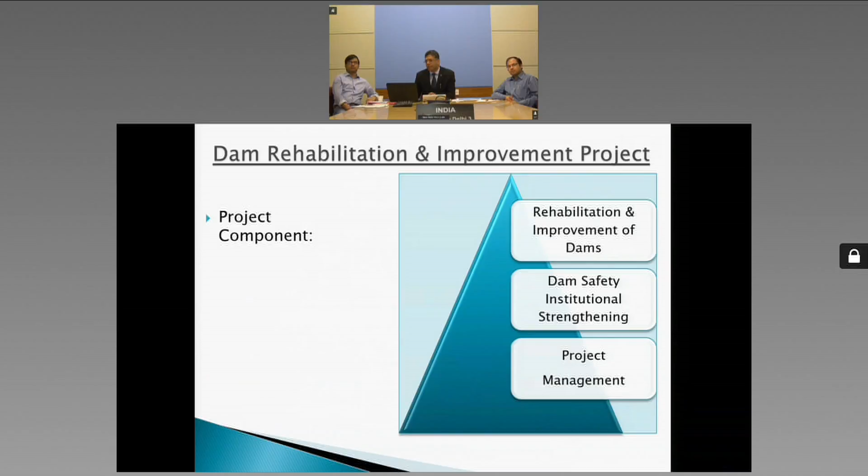As part of the project management, we have also got the services of an international consultant, essentially coming from France, and that becomes part of our central project management unit. Coming to the cost component, the project is presently estimated to cost about $310 million US. Almost 82% of the cost is going towards the hardcore component, that is the rehabilitation and improvement component for the dam. About 8% of the cost is dedicated towards capacity building, and 10% is going towards project management.

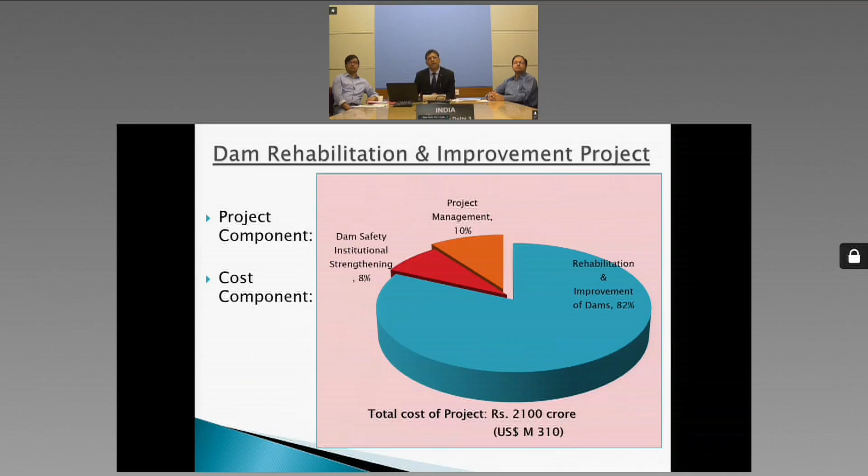The project implementing agencies, as mentioned by June, are spread over 7 states. In the states of Odisha, Madhya Pradesh, Kerala, Tamil Nadu and Karnataka, the implementing agencies are essentially the Water Resource Department. But from Kerala, Tamil Nadu, Uttarakhand and Jharkhand, we also have the power utility agencies. So altogether we have 9 implementing agencies which are part of the DRIP project.

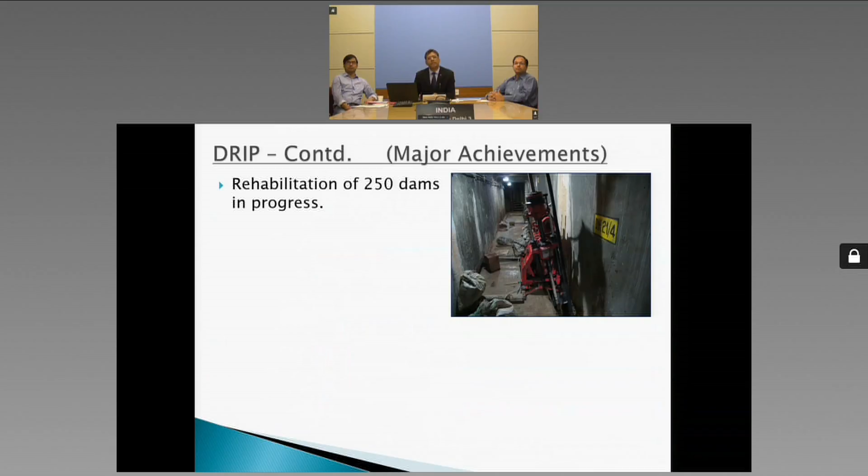I would like to touch slightly on the achievements under DRIP. We have already done the preliminary preparation part of the rehabilitation, and the works are in different stages in 250 dams. We have been able to do a kind of research study in understanding the unusual deformation which we are observing for over 40 years in our Idukki Arch Dam. In fact, Idukki is our only arch dam in India, and we encountered some serious unusual behavior, which we have investigated, and we are going ahead with the rehabilitation program of Idukki Dam.

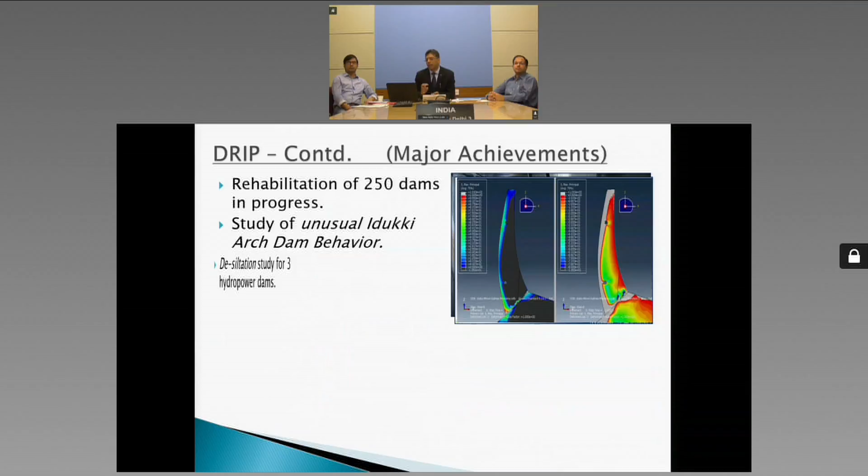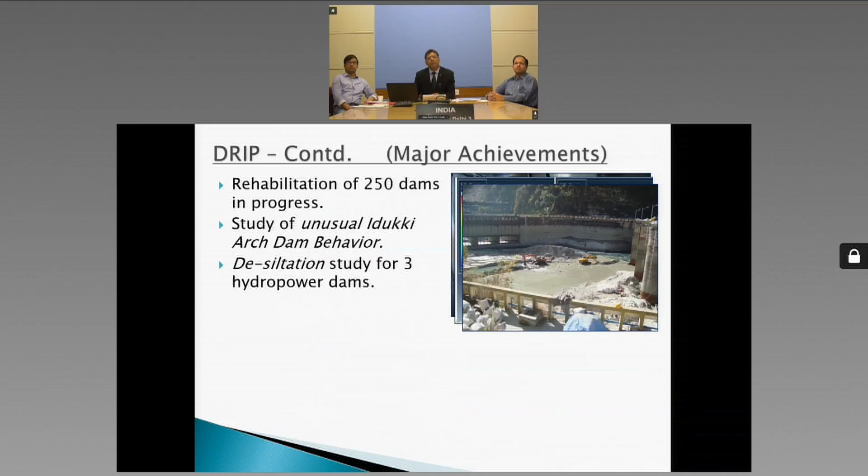We have also carried out a desiltation study on 3 of our power projects in Tamil Nadu, and we will shortly be taking up the rehabilitation measures to that extent. We have also recently taken up a study of a crack in Konar Dam. It's a very prestigious dam which initially started with flood management, but later on has become a multi-purpose project. And there have been cracks for a pretty long time, which has also compelled us to keep the reservoir at lower levels. So this study and subsequent rehabilitation will be very important for us.

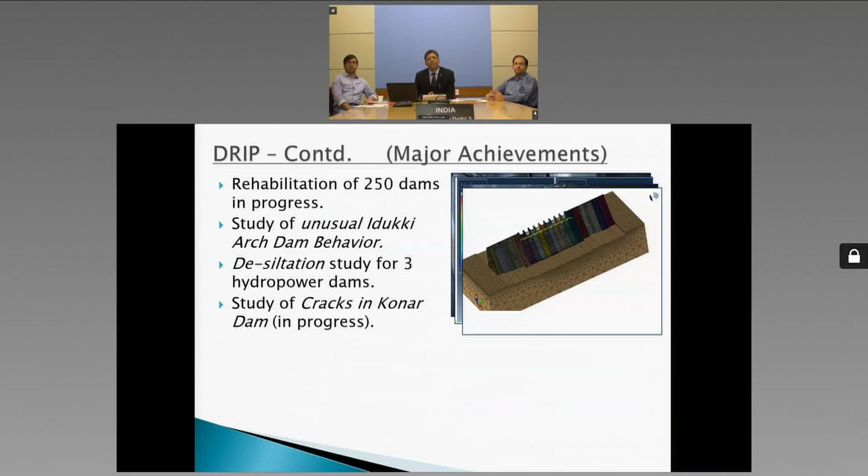Apart from that, in different rehabilitation programs, we have also tried to bring in the people inclusive approach. So in this one activity which we are going to focus on at Hirakud, we intend to bring a lot of input in terms of making our dams more people friendly. Our spillway capacity enhancement project is targeted with the intent of bringing people inclusiveness to the project at the Hirakud location.

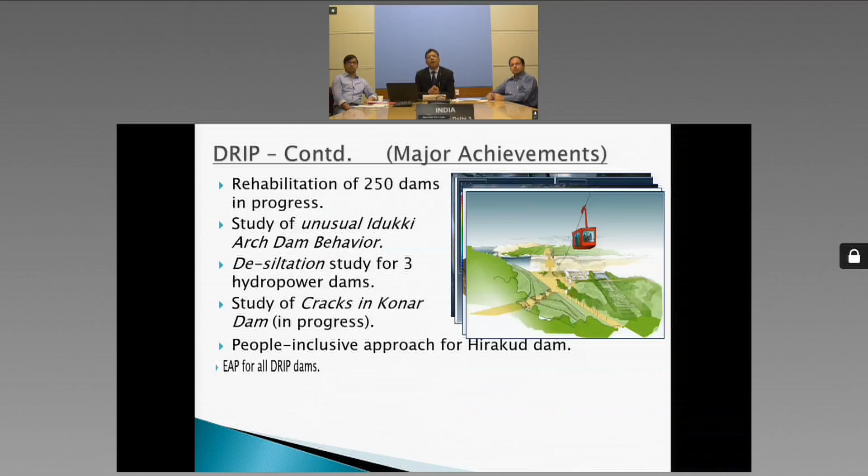Unlike Japan, where you have much more confidence in terms of the safety of the dams, in India we have a little uncertainty, especially in terms of flood management, and we need to have an emergency action plan, not only for a dam break scenario, but even for extreme weather conditions, where even the regulated releases from the dam are going to cause havoc in downstream areas. So we need an emergency action plan practically for each and every large dam of India.

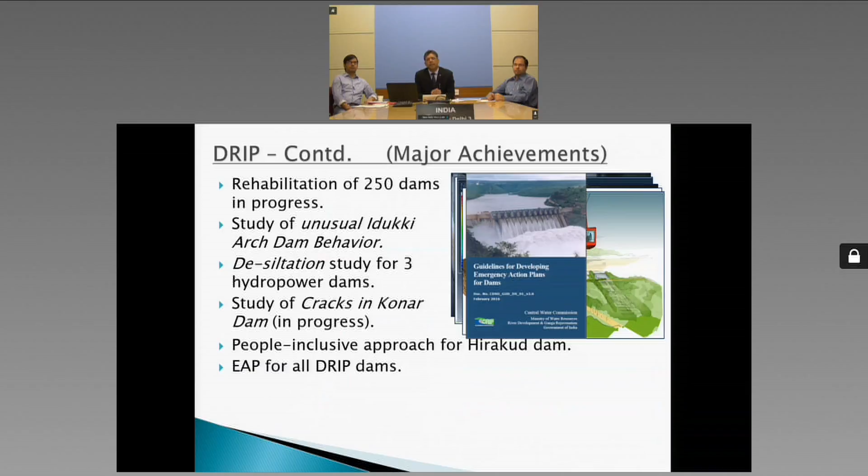So this activity we have also taken up under DRIP, and we intend to prepare an emergency action plan of very good quality for each of our DRIP dams. In fact, recently we have also come out with guidelines for developing the emergency action plan, and this activity has been taken up in earnest.

We have also decided to prepare a kind of asset management tool. We call it Dam Health and Rehabilitation Monitoring Application. It's a web-based software, basically asset management software. The work has already commenced, and we are ready with about 3 modules of this project. And shortly we will start gathering information using this software.

This software is going to be a very comprehensive software which will target complete information about our dam assets across India, including information which is purely engineering in terms of every asset component, also information related to periodical inspection, and also information related to every possible stakeholder, which is important from a dam safety point of view.

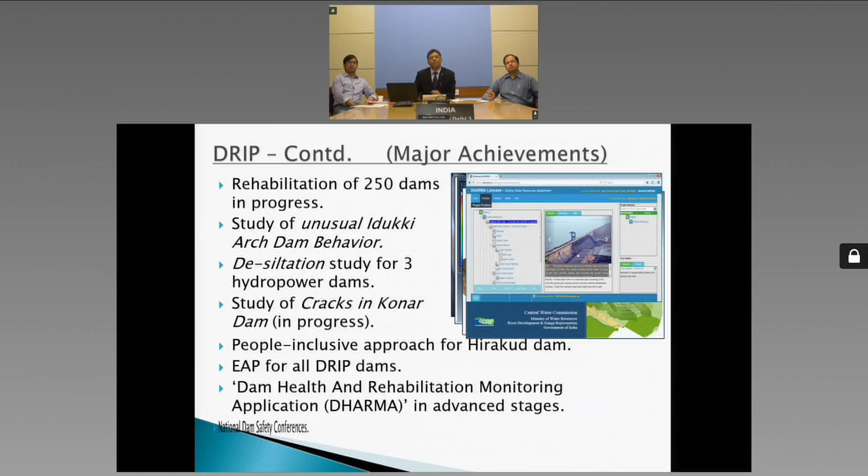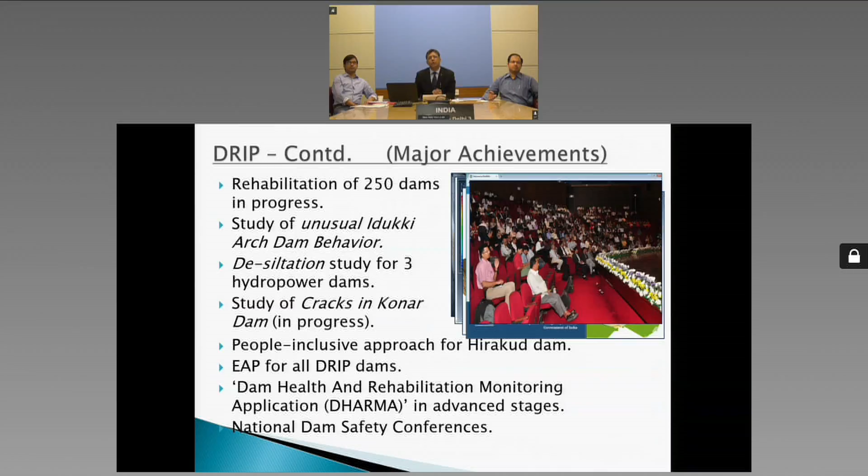As part of institutional capacity building, we have also started the National Dam Safety Conferences under DRIP. 2 of our conferences have already been held, the first one in Chennai followed by the second one in Bangalore. In fact, we got the privilege of our Japan delegation joining for our Bangalore conference, and the 3rd Dam Safety Conference is scheduled at IIT Roorkee in February 2017, and we would be happy if one more delegation can come and join for that program.

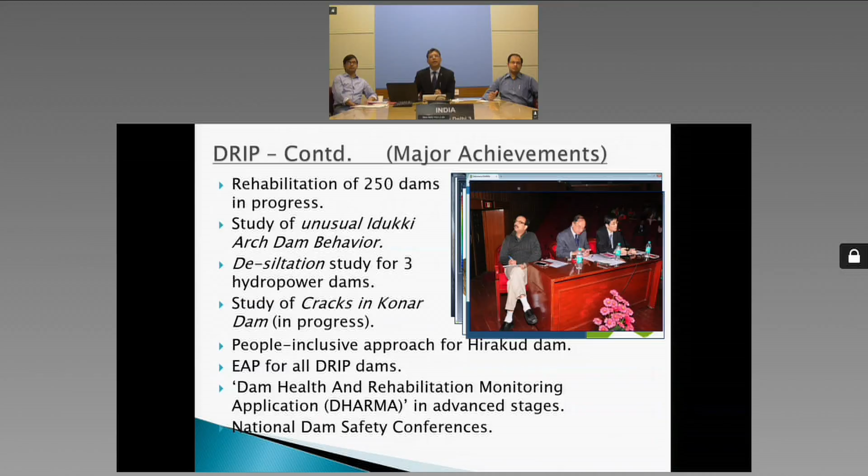Coming back to the exposure visit to Japan by the Indian side, so far we have gone through 4 visits where about 23 participants have taken the benefit. In fact, apart from Madhya Pradesh, the Water Resource Department of Tamil Nadu and the Damodar Valley Corporation, every other implementing agency has already joined this particular exposure visit program.

The key benefits which we have been able to gather, if I try to summarize, are the exchange of knowledge, exposure to some important dams, 7 dams altogether the team members have been able to visit, and of course the benefit of networking with the officials of Japan, especially the Japan Water Agency, and definitely the exchange of customs and culture, which I understand has been a key to continuing our collaboration further.

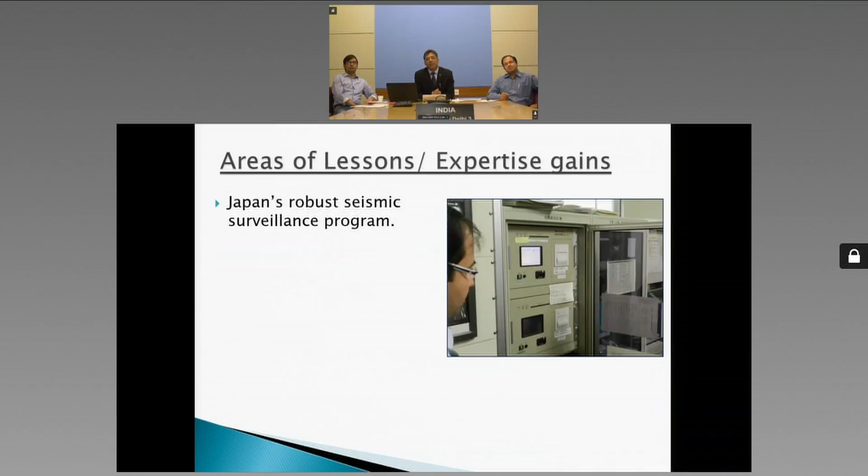Coming to the areas of lessons and expertise which we have been able to gain so far, we understand a large benefit is coming in terms of understanding Japan's robust seismic surveillance system which is already in place. We got a lot of understanding in terms of practical aspects of forewarning of catastrophic events, basically the earthquake early warning system which is already in place, as well as the emergency response system.

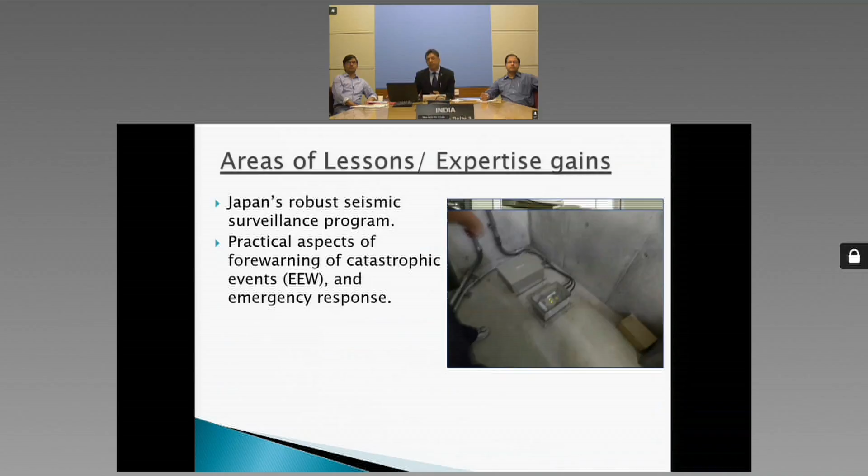The standard operating procedure which is already in place at each of the dams in Japan in terms of seismic event response has been really impressive for us, and we intend to put this SOP in practice in all our high hazard seismic areas

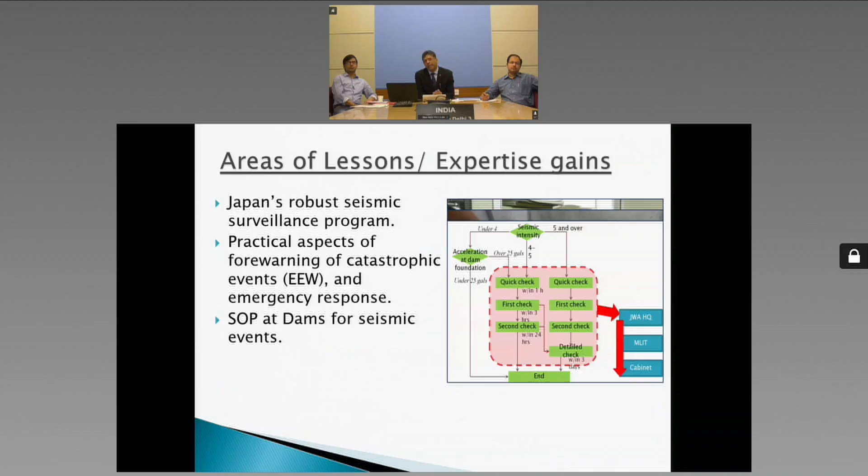for our Indian dams. We were quite impressed by the O&M capabilities which are already put in place in Japan, especially in terms of managing with low manpower resources compared to Indian dams. We understand that the Japan dams have much less manpower, but very good quality O&M practices which are in force.

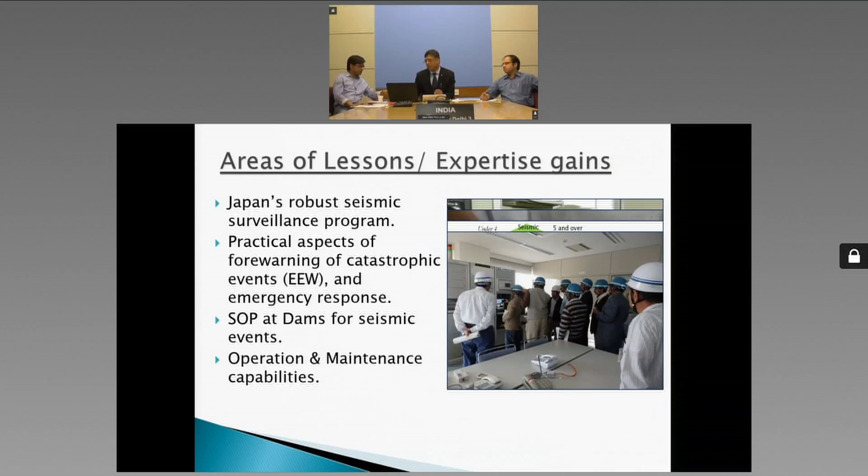And automation of dam monitoring system. This is something which we have been trying to do in some of our dams. We have been able to get a good level of automation, but still our team members could actually take a lot of input in terms of the capacities for automation of dam monitoring systems.

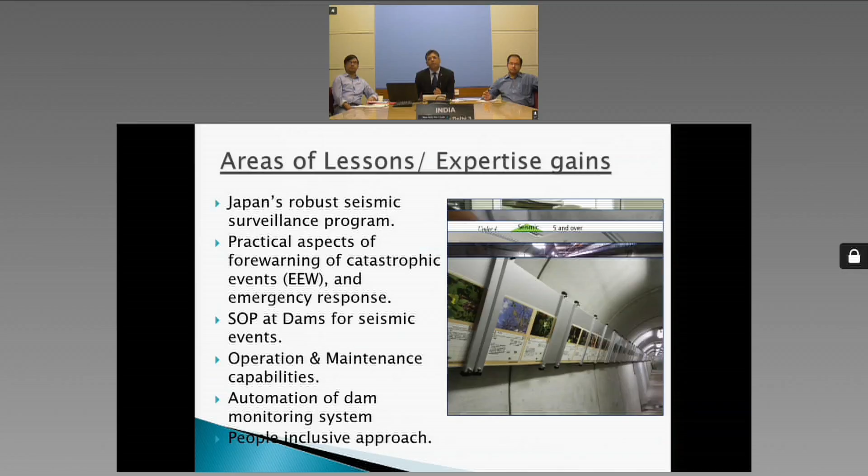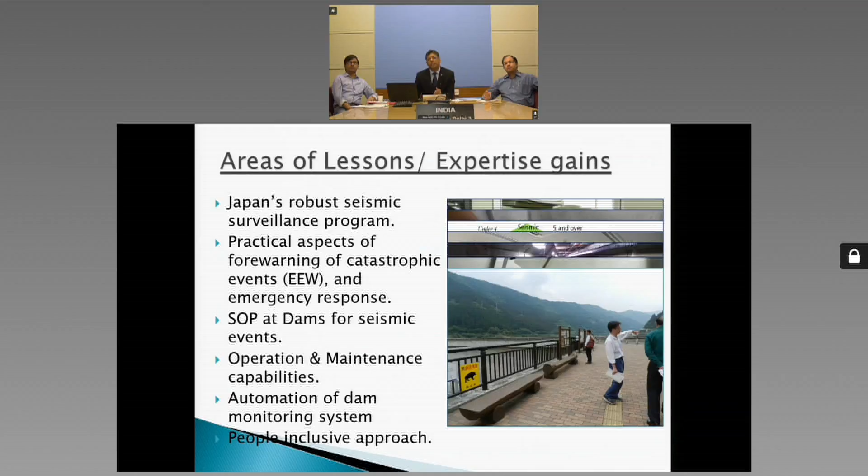And of course, the people inclusive approach, which we could see at the locations in Japan, where we have seen that everything has been done from a point of view of a greater inclusive approach to people's participation. These are some of the pictures; there are many pictures, but only a few have been able to be put up here. The last one shows the dam curry rice, as you call it, in the form of a dam and reservoir.

That was really impressive. In fact, we got an idea of doing such kinds of things for our DRIP dams also, and over a period we will actually be copying some of the ideas which are in place in Japan.

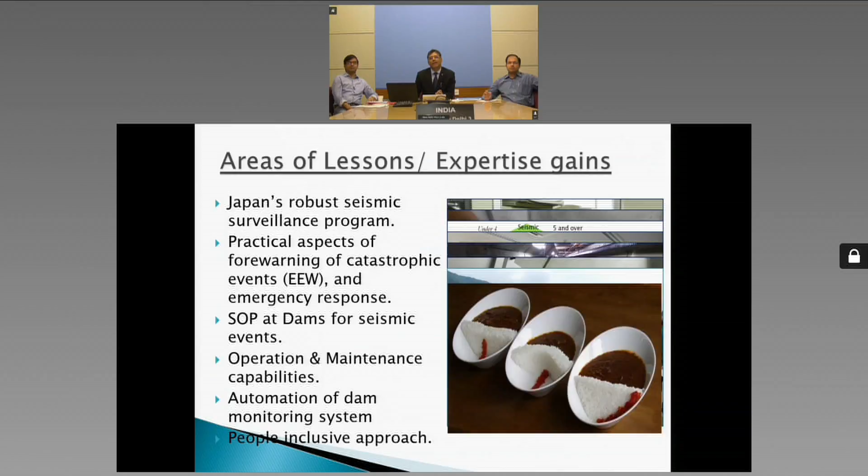We got a different insight about how you identify the dam benefits. Typically, we identify these benefits in terms of the storage volume, but in some of your presentations, we came to notice that you mentioned more in terms of discharge indicators rather than volume indicators. And further query has given us a lot of insight as to how you indicate the discharge level indicator as a beneficial indicator of a dam project.

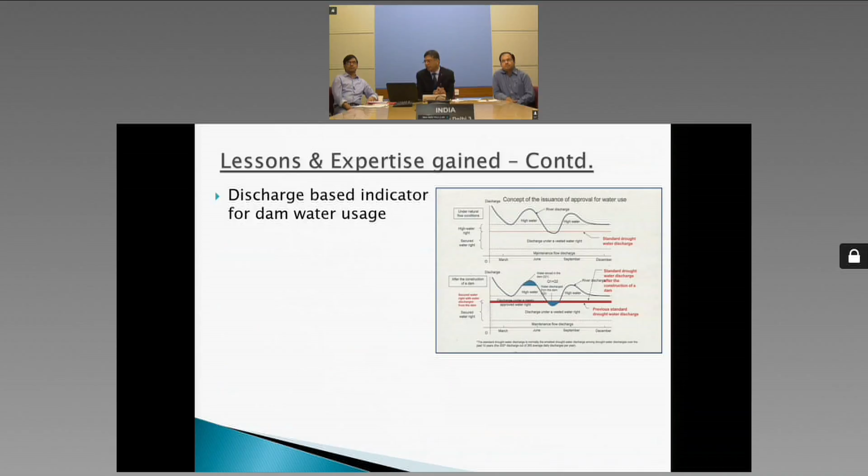We understand that you have assumed a very high factor of safety in all your early dam construction activities, which somehow we have not done, primarily because of the high cost involved. But we realize that over a period, this also helps in dam safety and the overall O&M process. So looking at this was also a kind of insight. As our economy grows, probably we can also try to look for a higher factor of safety in our dam design.

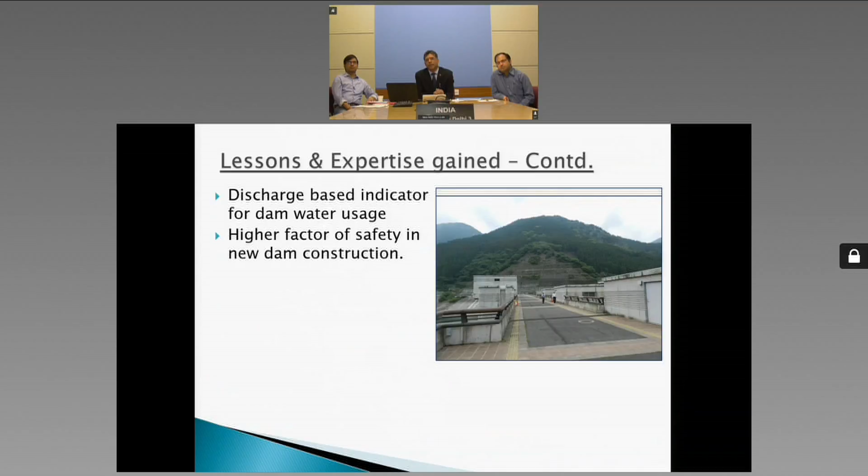We also noticed that typically in an Indian dam we have a hoist system which is always an independent unit for each gate, all kept by and large in the open. But in almost every dam which our team members visited, we saw that the hoist system is put in a kind of centralized housing, fully covered. It definitely improves the O&M practices, and I think gives longer life for the machinery. And the control is also easier with this kind of arrangement.

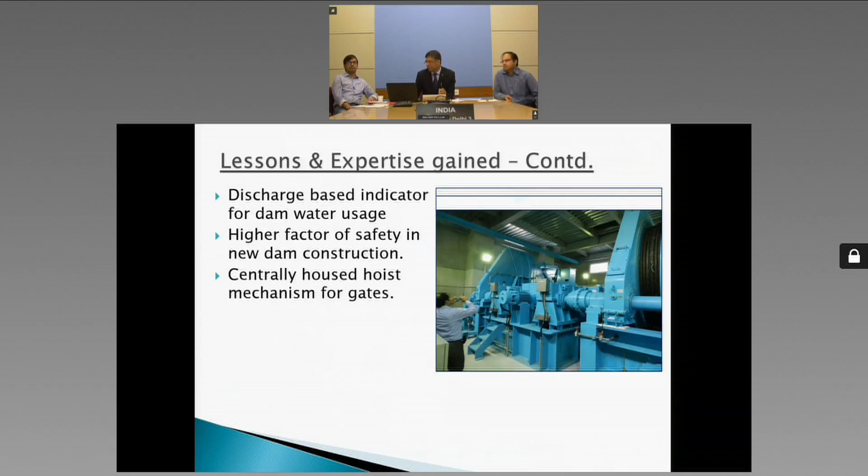This was something quite impressive, and at least to my knowledge, we have not utilized this system so far in any of our dams, where you have a telescopic gate arrangement to draw water through the sluices. You use this practice essentially to draw water of varying temperature levels, depending on the downstream requirement and the actual reservoir temperature conditions. But we want to explore this system in our dams with a possibility of silt management.

If that can work out, then some of our existing dams can leverage it to tap water from a lower level for the existing level of sluices. Last time I already had a discussion with Dr. Kido on this, and if possible, we will try to explore this as a collaboration for at least a few of our DRIP dams.

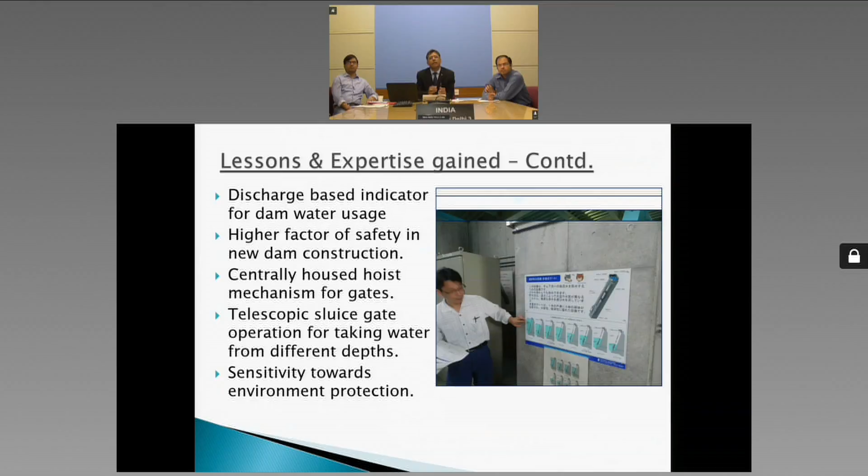Coming to the sensitivity towards environment protection, when I was visiting this particular dam, there were a few ledges on the downstream of the dam, and I inquired what these were for. I was rather surprised when I was informed that these are meant for eagles' nests. Of course, I was also informed that this was done under pressure from an environmental group, and later on it was not really successful. But even then, the kind of efforts Japan puts in for such measures was impressive.

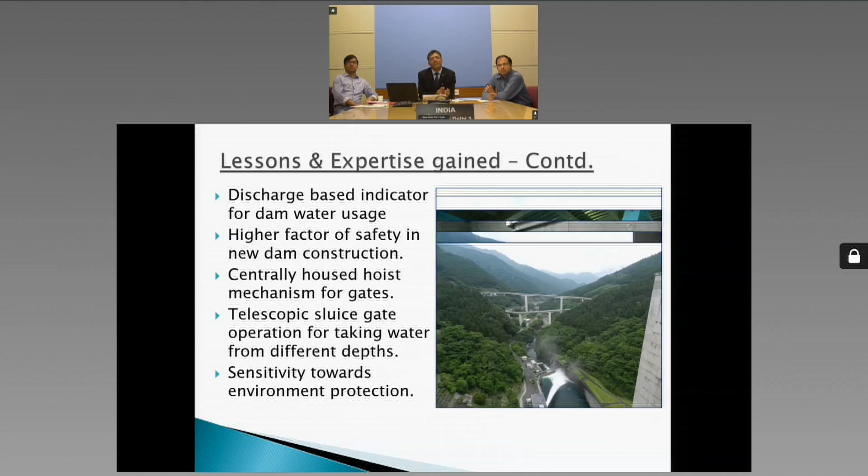And of course, this particular arrangement where, to save the forest, you have taken a bridge across the river just to come back to the same line to gain grade. That was also impressive. And this is one photo which I took from the dam axis, where you can see deer grazing on the abutment side. There are many points which were very impressive in terms of your measures for environment protection.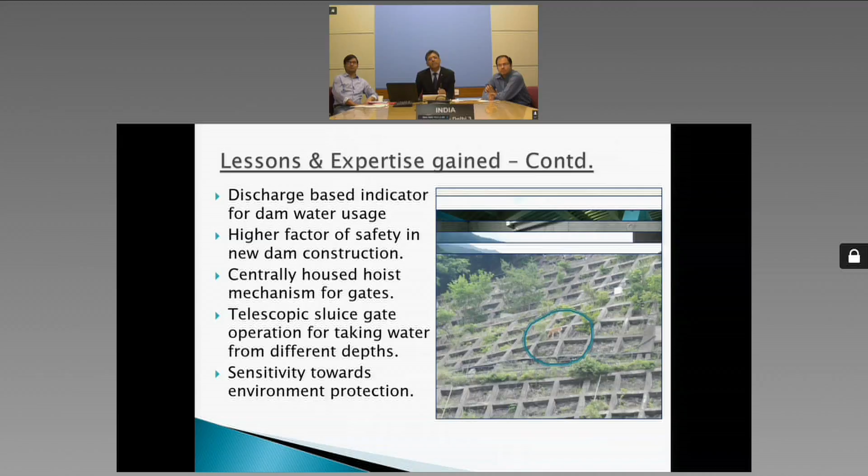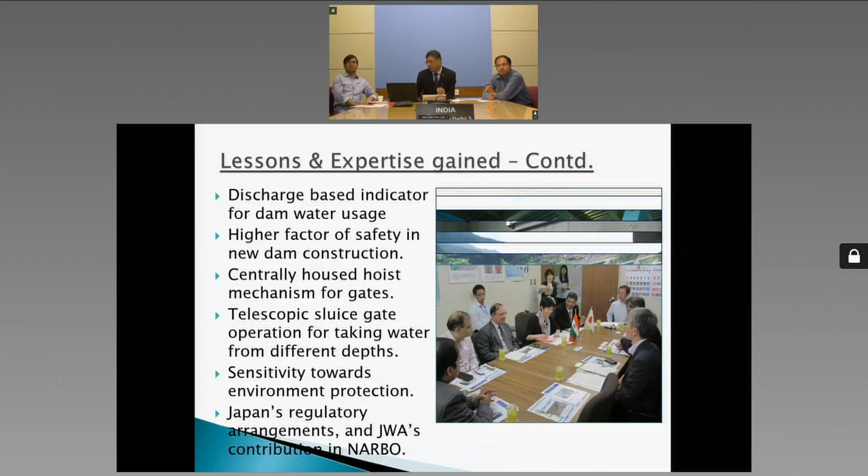And of course, we could understand and gain a lot from the overall regulatory and financing arrangement put in place by the Government of Japan. We also appreciated the role played by Japan Water Agency in the Network of Asian River Basin Organizations, and at some point CWC will be happy to collaborate in NARBO also. We were really impressed by the history of Japan's dam building, with the understanding that more than 305 dams belong to an era of something like 1867.

Japan has a very good track record in terms of dam safety. In fact, India has also done really very well, and our safety record is one of the best as per dam safety practices. But still, we really want to raise the bar and touch greater heights in terms of dam safety records.

We were impressed by the various inspection procedures set in Japan in terms of routine inspections, extraordinary inspections, periodic and comprehensive inspections. In fact, the comprehensive inspection which Japan targets at something like a 30-year interval, we are trying to bring down to roughly a 10-year interval for our DRIP dams. In fact, our dam safety bill, which is in the pipeline, talks about comprehensive dam safety inspection at an interval of 10 years. But overall, your inspection procedures and SOPs were quite impressive.

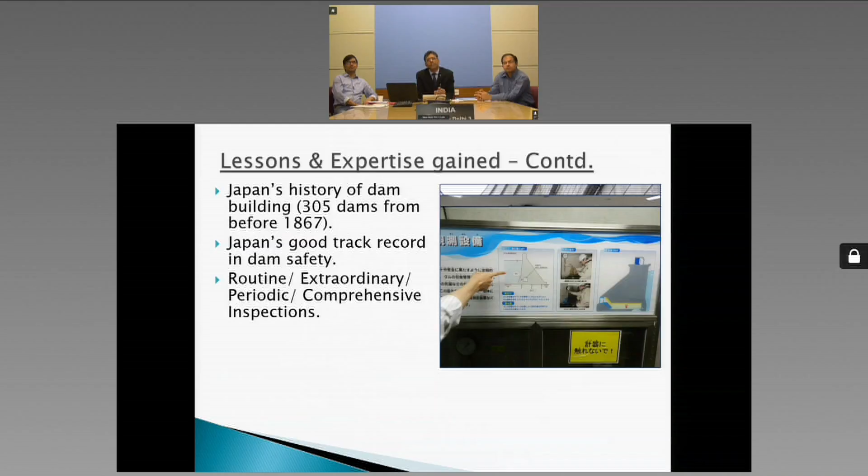We were really enlightened to understand the kind of dam instrumentations already put in place, especially because for most of our dams we have gone for extensive instrumentation, but it has not really worked well. Most of the instrumentation during the construction stage has not been installed properly, and we have very few dams where we've gained benefit from instrumentation data. But what we saw in Japan was really impressive, and we think we can improve our instrumentations.

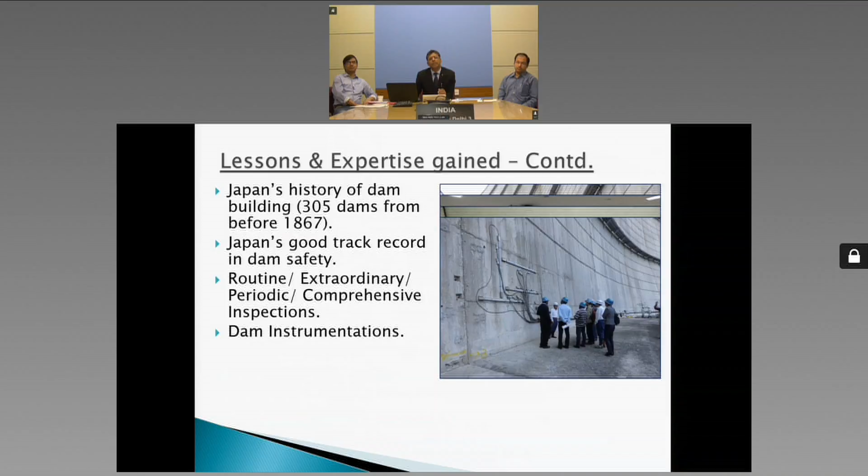From our second team onwards, our focus shifted to sediment management also. Some of the dams where sediment practices have been put in place were visited by our team members, and the information gathered was really impressive. We would like to look forward to some of the check dams, especially permeable check dams and other sediment management practices in place in Japan.

We have serious issues with some of our hilly dam projects, especially under UJVNL, where some dams have practically lost their storage levels, and we have serious issues of rock boulders falling from the spillway side. So this arrangement already in place in Japan will be helpful for us.

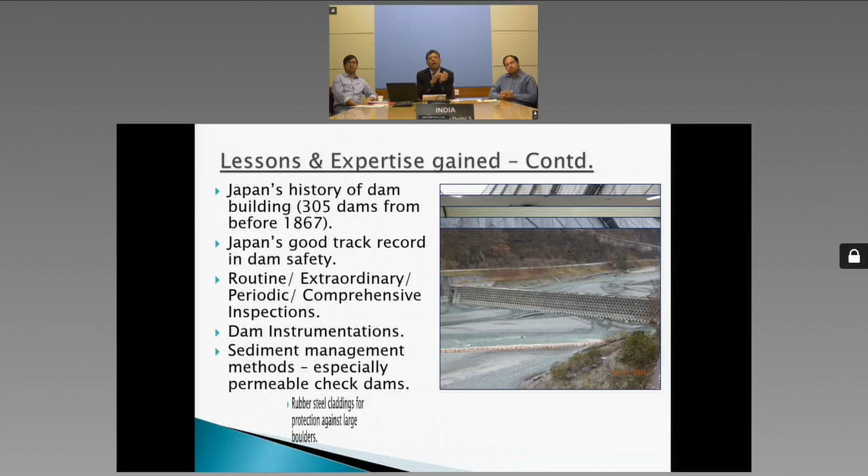At least one of our teams was quite impressed by the rubber steel claddings put on the piers for protection against large boulders. Probably this will also help us in many places.

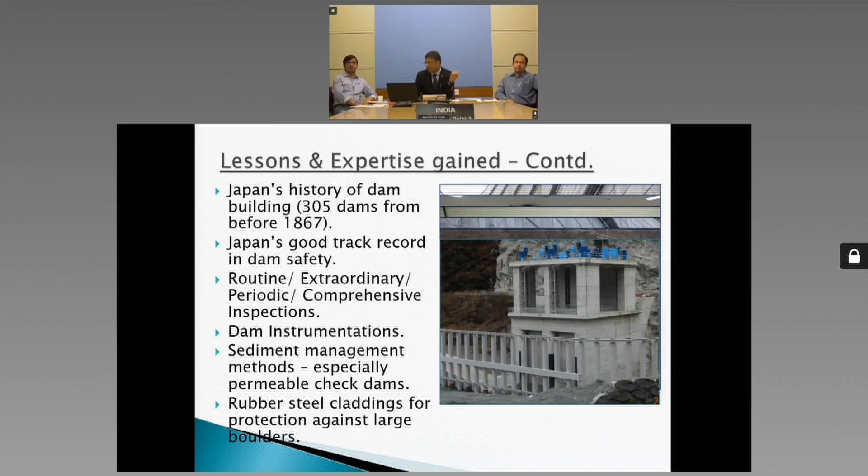Coming to areas of priority concern for India, our concern as of now is that we have about 5,000 large dams, and almost 80% of them are touching an age span of something like 25 years. These dams have already gone through issues related to deferred maintenance. Some dams have problems associated with initial troubles in investigation, design, or construction methodologies. So our focus is now gradually shifting to rehabilitation of these aging dams.

As I mentioned, we have a serious gap in terms of instrumentation. For existing dams we cannot do much to improve embedded instrumentation, but we would still like to gain knowledge and improve our instrumentation as well as the response system.

Forewarning of catastrophic events is important for us, both flood and seismic events. A lot of work is already going on with the help of IMD, the Indian Meteorological Department, and other agencies in terms of flood warnings. For seismic warning, we will try to get advantage from collaboration with Japan, especially in terms of seismic event response systems or the kind of SOPs already in place. We would like to understand and work further in that direction.